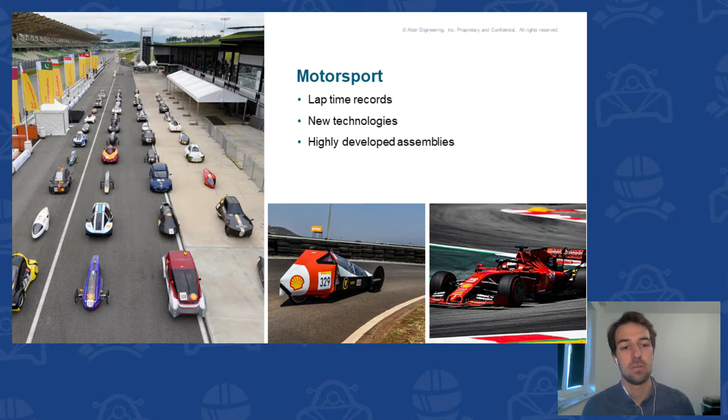Of course, motorsport is a big engineering challenge. Not only automotive companies are continuously under pressure to set new lap time records, develop new technologies, and keep on breaking their records. Part of this are race cars. They are characterized by highly developed assemblies - engine, chassis - and of course external aerodynamic and internal aerodynamic characteristics are a main part of it.

The same yields for the Shell Eco Marathon. Every year, all these teams compete on events in ultra efficiency classes. Beside the drivetrain, the kinematics, and the software, the external aerodynamic is an essential element to reach ultra efficiency.

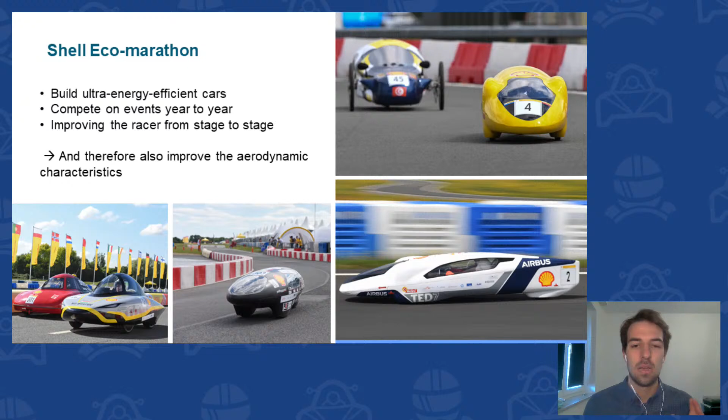Let's start from the beginning. What really is external automotive aerodynamic? Let's say external automotive aerodynamic is related to the flow around the vehicle. And the flow around the vehicle then directly leads to forces acting on this vehicle.

So what is it? The drag is the force which acts against vehicle direction. It's directly related to fuel consumption, maximum velocity, and range. The lift force is the force which pushes the vehicle on the ground, and it's related to driving stability and cornering behavior.

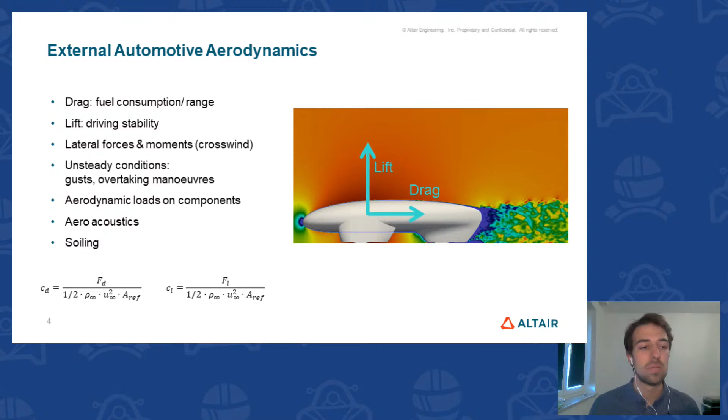So the big question is, where does it originate from? Can those regions really be identified? And can we maybe have a little bit deeper look into it?

In respect to Shell Eco Marathon vehicles, I think the most important might be the proportion and shape, and of course the wheels and the wheel housing.

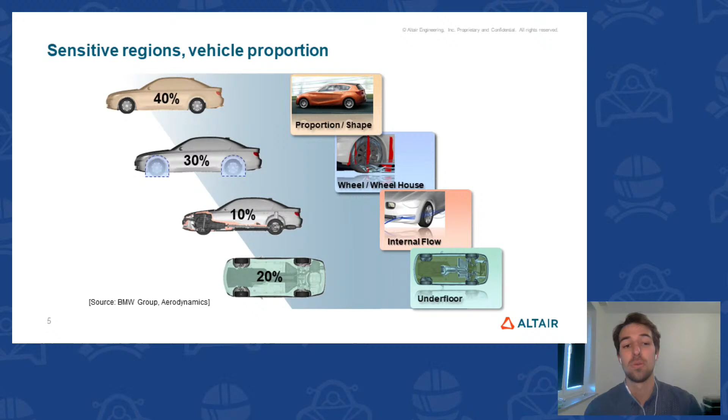So imagine you're driving in the city, and now you change that coefficient of drag around 0.01. Then the fuel consumption changes also, about 0.01 liter per 100 kilometers. That would be related to a change in vehicle mass of about 6 kilograms.

Now imagine you drive a little bit faster, let's say 120 kilometers an hour. Now we change this coefficient of drag about the same amount. The fuel consumption changes now about 0.09 liters per 100 kilometers. And this is already related to an equivalent mass of 129 kilograms. Quite a lot, don't you think?

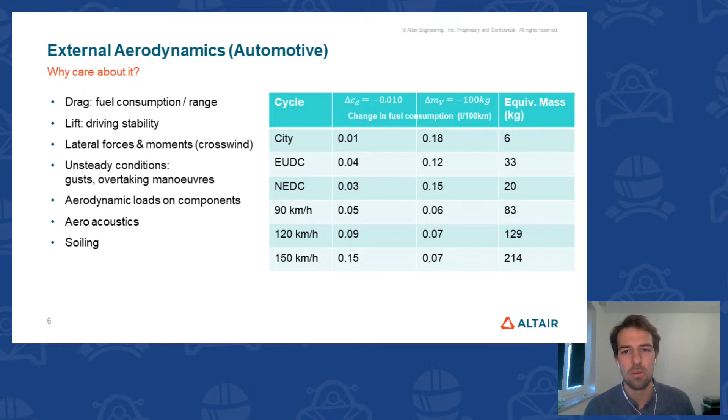Okay, so now we've got it all in place. Let's have a look at what it's all about to optimize the aerodynamics.

Optimizing these aerodynamics is quite a difficult task. It requires theoretical knowledge, experience, experimental data, maybe from wind tunnel or simulations, and all this put together has to be achieved to reach an efficient, balanced, and good aerodynamic setup.

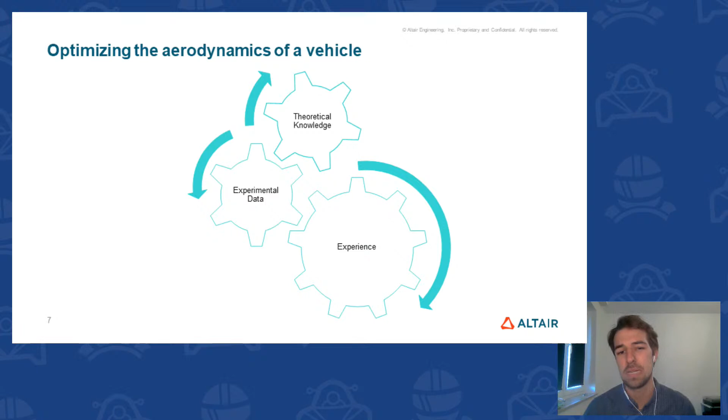So today my mission is to give you an ultimate insight into lower energy consumption and better performance from optimized aerodynamics. So let's have a look at what we're dealing with in detail.

This is me, Paul Over, and I'm going to present to you today the optimizing of the aerodynamics of the vehicle. And first of all, we have a small look into theory.

It's quite a difficult task to understand the aerodynamic behavior. So we'd like to get up some theoretical knowledge from maybe your classes or school to really follow everything. Of course, simulations are also nowadays an integral part of vehicle development and thus an integral part of engineering life.

So after that theoretical part, there follows a practical one. I'm going to show you some brilliant software which makes it really intuitive to set up a simulation for your own Shell Eco-marathon racer.

And in the end, we, of course, have a look at some results I prepared and talk about common ways to process your simulations in an efficient way and really get your design iteration going. And after this whole session, you should be able to start with your own ultra-fast simulation.

So let's hit it off. Let's start with some basic advice in ground vehicle aerodynamics. How does reality look like? Okay, it's not really the reality.

It's more a kind of a schematic car sketch I took here, but let's try to understand it.

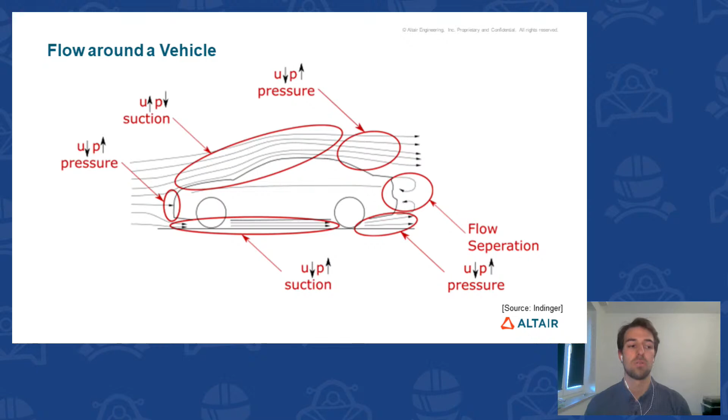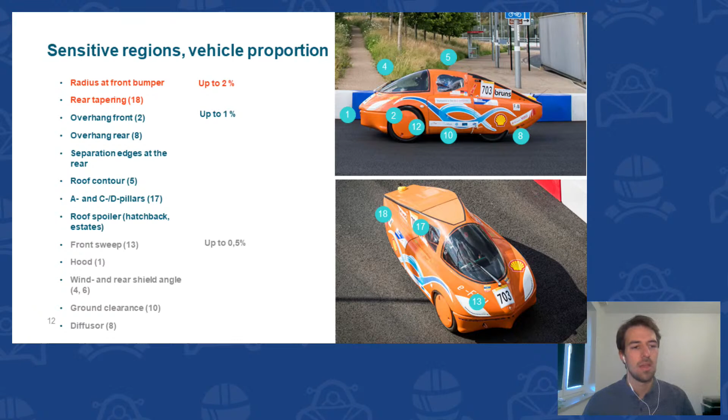And when you remember the numbers from the beginning, think about how much energy you could save by optimizing it. Quite a lot, don't you think? So how do we optimize it? How do we save these amounts?

Okay, like I already said, and like you saw on the last slide, there were a lot of numbers placed on the lower end of the car, close to the underbody. The underbody should be separated into ground clearance and pitch, and also underbody covers.

If we increase the pitch so the nose of the car goes up, it would lead to increased drag and lift. A negative pitch, nose down, creates a pseudo diffuser effect on the entire underbody, which reduces the drag and lift.

The smaller the ground clearance, the lower the drag, of course. Regarding lift, there's an optimal ride height for the car - an optimal gap to create the optimum amount of lift. It's a good screw to really get the balance of the aerodynamic setup right.

When we come to underbody covers, it's quite important that the flow under the vehicle is smooth. Therefore we need to reduce the roughness of all the tubes and parts down there. So when it's possible to cover the underbody starting from the front, as far downstream as possible, that's quite good.

But attention here - complex shielding of the underbody is not always possible. There may be thermal requirements, cooling or air transport needs, or other constraints due to chassis or axles. Like here in the picture, only the blue parts were replaced and fully covered.

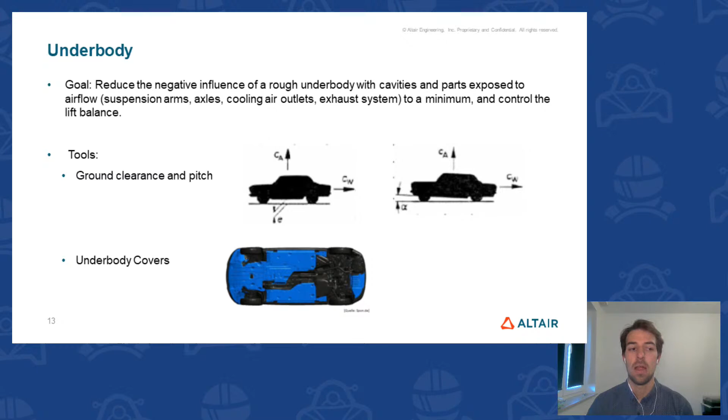Like I already introduced, there's a design, a device, which can help quite a lot. It's called the rear diffuser. The installation drag we already had is nearly close to zero, which makes the diffuser really helpful.

A well-designed diffuser can help reduce drag and also lift. In general, longer diffusers are a little more efficient, but they only work well for undisturbed airflows, as found on many of your vehicles.

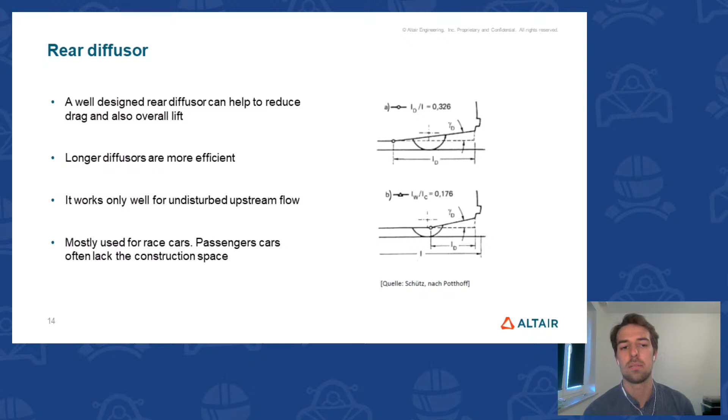Like here in these small pictures on the right, there are some special numbers and maybe some strategies to improve their working. Work with these theories, apply them to your car and simulate them.

Another part on these Shell Eco-marathon vehicles are, of course, the wheels. When we look at the picture and at efficiency, we always see that the wheels take up a big proportion of the overall vehicle.

The superposition of the flow around the car and around the wheels leads to a super complex flow, and the additional wheel rotation introduces another effect. So we can sum up that the total drag of the car is produced 30% by how the wheels look and how they perform. So there's lots of potential for optimization.

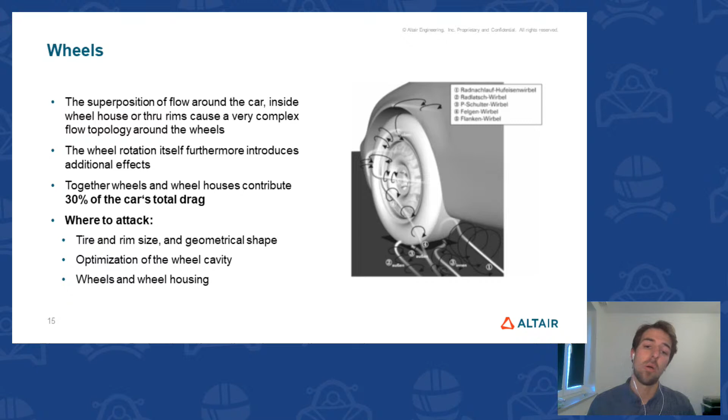So where to attack? We could alter the tire or rim size, or go to a closed wheel setup instead of an open one. I just want to point out: do experiments, or better, run simulations to get the optimum.

But as well as the wheels, there's also maybe a big last point I'd like to speak about. All the vehicles need some cooling air for either the fuel cells, the batteries, or even the engine. These inlets and outlets of your internal flow are also quite interesting, and I'd like to speak about how to design these interfaces.

Now, when we look at type C, the air flows into the radiator at the lower end and flows out at the upper end again. So normally a little bit more hard to realize on most vehicles, but we have a really low drag and the mass flow is nearly the same. So the conclusion is that inlet and exit with face in normal stream direction does not necessarily include low drag values. Be creative and experiment around to get the optimum design.

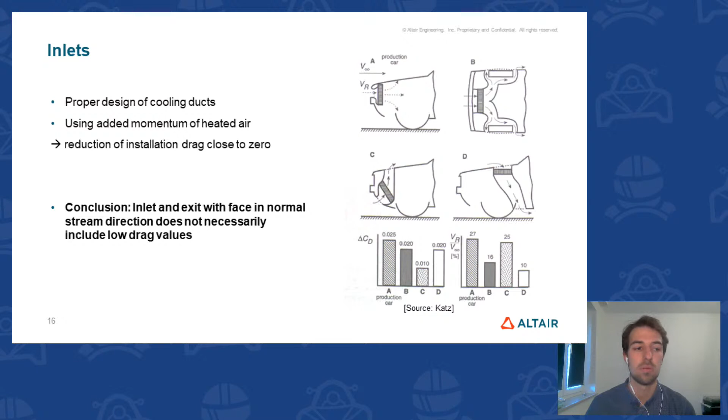Beside the inlet, of course, there are the exhausts. Nearly the same importance applies for them. In general, we can say that they should be placed in low pressure regions or low pressure coefficient areas to make them work a little bit better, to perform them better. But attention here, the outlets always increase the boundary layer thickness and therefore the likelihood of that phenomenon flow separation, which leads even to more drag. We already had that in the schematic car slide, that flow separation is mostly associated with drag.

Let's have a look at some examples here as well. For example, in part A or figure A, here we have a conical sheet metal, and the influence on drag and pressure is quite all right, I would say. In part D, we have a flush exit. Compared now to part A, we have nearly no influence in pressure and less influence in drag. Additionally, when we set it right, we can also improve the momentum transport to the boundary layer and bring more kinetic energy close to the vehicle. But be patient with that.

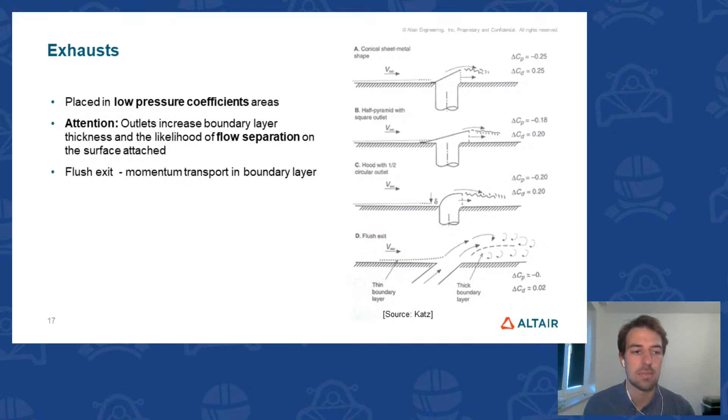Okay, closing up this really nice reality one, let's switch also to the virtuality, which is also a big part. When it comes to simulation, we should talk about this as well. And why should we use simulation? What are the common methods? Or maybe some questions you're asking yourself. So what and why should we use simulation?

First of all, maybe there's a point of money, of course. Here's more comparison: the small prototype developed in the high-end wind tunnel, it's quite expensive. Another point for student teams, it's a big point as well, that there is no wind tunnel or that you can't use it all the time. So computational fluid dynamics is a flexible and fast alternative to wind tunnel experiments. CFD offers almost unlimited possibility for the analysis of flow fields. You can just click on the mouse, zoom around in these computational domains, and check every value separately. Coupled with this really high computing power of today's computers, CFD makes it possible to develop more complex aerodynamic components and further increase the performance of the vehicle without building and testing everything like some big car companies do when they produce these mock-ups or prototypes.

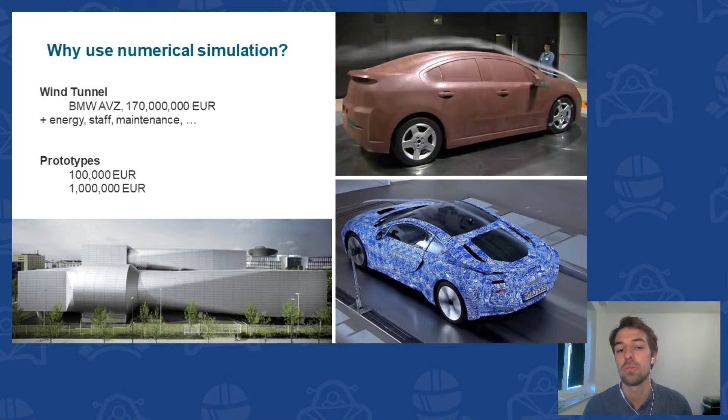But let's have a look at what's on the market. So on the market, there are two big ones. These are just the common ones, I would say. I just picked those. So we have the Navier-Stokes approaches, which are maybe known through fluid dynamics classes, and another one, the Lattice-Boltzmann one. The main difference between them is how they interpret the continuum. The graphic on the right summarizes those differences quite well, I think.

So let's start with Navier-Stokes. Navier-Stokes is a conventional CFD solver, and it uses a macro scale interpretation. It means that length scales are as we know them in meters, millimeters, or feet or inches. The continuum is divided into small cubes like your room. The wall is 5 meters long, the other 3, and we can divide this room by having 1 square meter places all over.

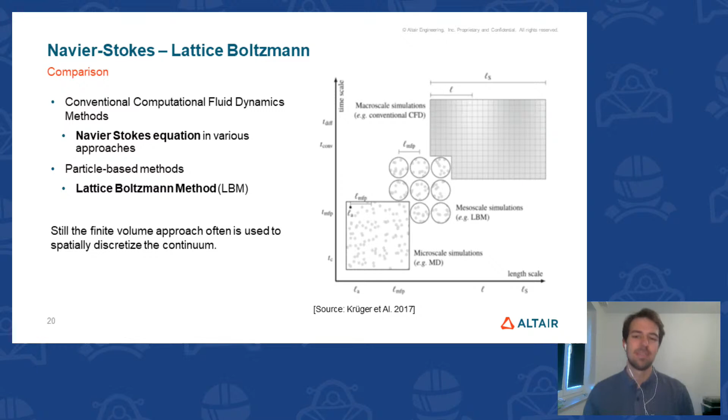Both methods, Navier-Stokes and Lattice-Boltzmann, are often used or implemented with a finite volume approach, which is used to spatially discretize the continuum. But now, if we take the comparison from a theoretical view to a practical one, we can show a bit more advantages.

In a direct comparison of the methods, of course both can describe the external aerodynamics. The Lattice-Boltzmann method is transient and explicit. The Navier-Stokes is implicit, mostly steady state. So Boltzmann, due to its transient and explicit nature, gives us more accuracy. It's possible to design aerodynamics more exactly, especially when it comes to high-end efficiency. It's even possible to look at aeroacoustics. In the Navier-Stokes way, all the transient information is often averaged and summed up into one single shot or frame, the steady state one, so we can't capture all the effects - for example, the cavities or the vortices around the wheels.

When it comes to the mesh comparison, there are also some differences shown in the image below. In the Lattice-Boltzmann, we have a surface mesh with really low surface mesh requirements, which shows that around the edge it doesn't get much finer. In the Navier-Stokes one on the right, we see high surface mesh requirements - around the edges the trias get really small and they are high quality. It takes a lot of time to work on this.

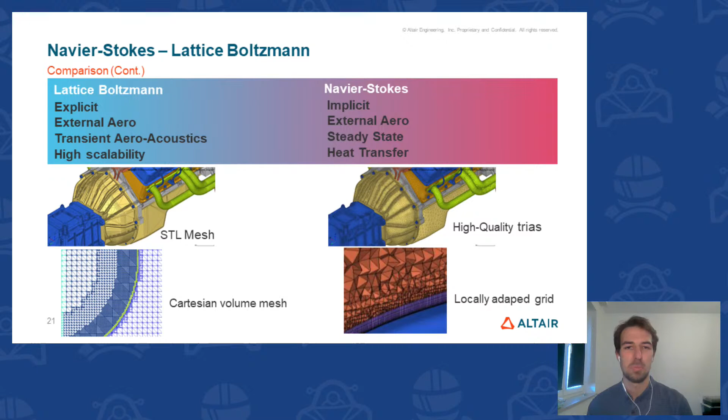Let's have a look into some small last theoretical base things and then start off with the practical part. So the Lattice-Boltzmann method is based on the Boltzmann equation. The Boltzmann equation is comparable to the Navier-Stokes equation, but now in a totally different approach - it's solved on the lattice. The lattice is constructed out of these voxels. On the right, you see one.

Now the solving step is separated into 2 steps, the streaming step and the colliding step. Particles stream in a determined direction in the streaming step. Then they collide in the colliding step, and in the colliding step new velocities for the next streaming step get computed. Now we discretize, and we just allow 19 different velocities, because we use a D3Q19 velocity set - 3 dimensions, 19 velocities. Due to this discretization, we keep the transient nature of the flow inherently respected, and the physical behavior is determined directly by the viscosity of the fluid.

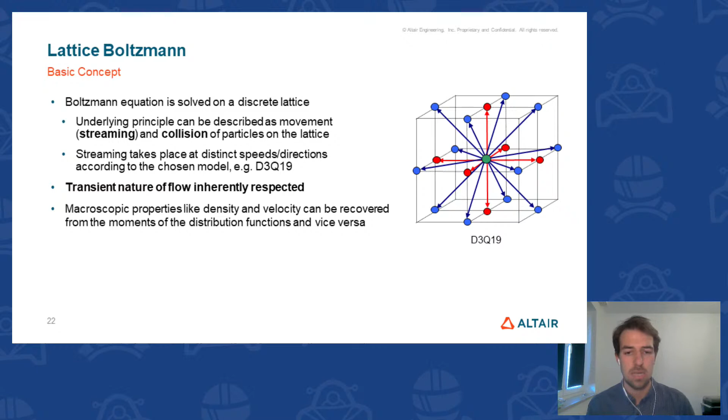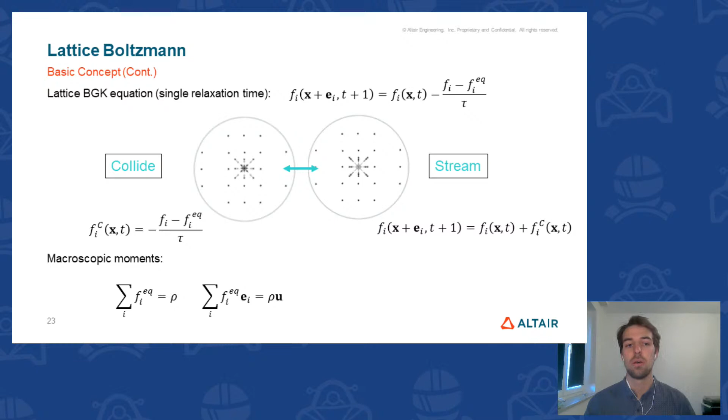So let's take a small look into the iteration process in detail. The iteration process, like I already said, is divided into the colliding step and the streaming step. Up in the right corner, you see the Boltzmann equation - it sets the recent and the equilibrium density of particles into relation. In the collision step, of course, we determine the next velocity. In the streaming step, they stream in the direction with the assigned velocity. Based on these equations, we can recover the macroscopic moments like velocity, density, and pressure, and then reach our transient simulation result.

Now just summing it all up, the theoretical part was maybe quite a deep thing, but let's break it down to some basic things. We have low surface mesh requirements, trivial volume mesh generation, and transient simulation, which should be even more interesting in regard to high efficiency aerodynamics.

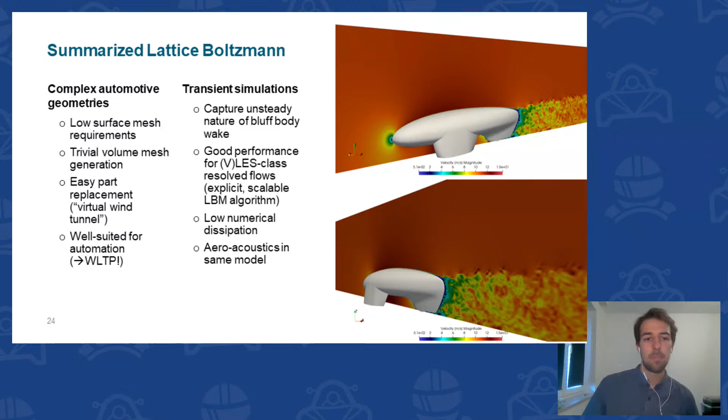So let's get back to the slides. I think it's quite enough with theoretical background. Let's see how the things really work.

Every simulation has a simulation pipeline in this general way. First, the preparation, the surface preparation, which is what we do in Inspire. Then we go over to the pre-processing, the setup of the simulation with the wind tunnel, following with the solving, where we use UltraFluidX. And the last step, we post-process the results by using AcuFieldView.

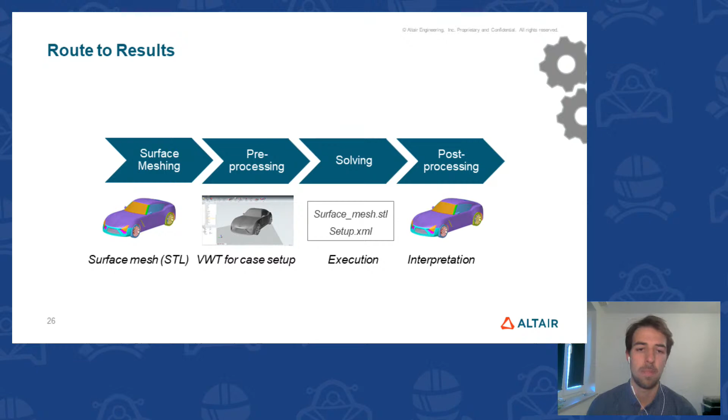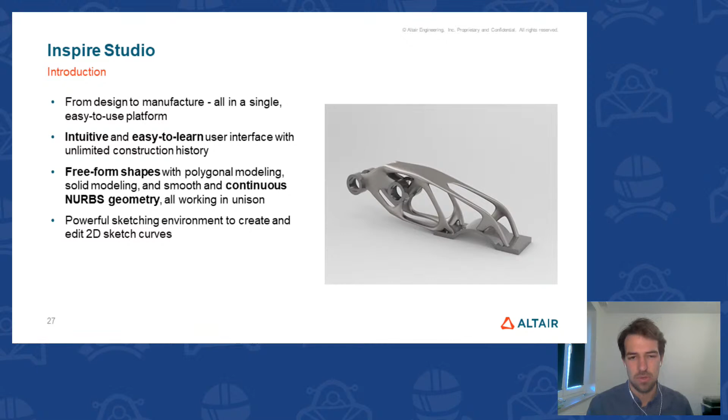Let's have a look at the programs in detail. From design to manufacture, all on a single easy-to-use platform, Inspire offers an intuitive and easy-to-learn user interface where we can free-form shapes with polygonal modeling, or what I really like, continuous NURBS geometry, where we really control the whole geometry. We have some sketching environment, and of course we can discretize to surfaces, which leads to a smooth transition.

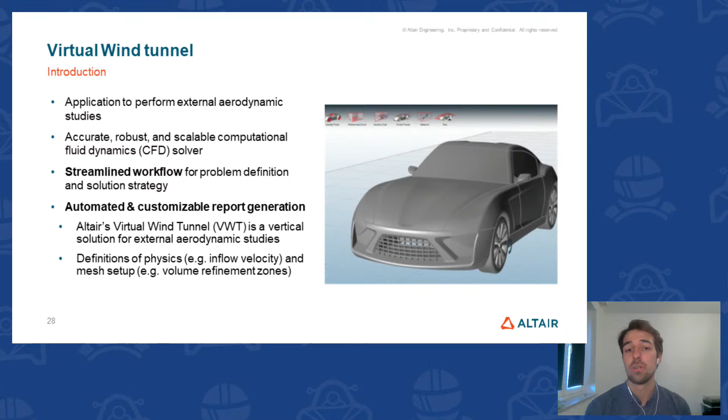To virtual wind tunnel. Altair's virtual wind tunnel is a vertical application tailored for external aerodynamic studies. It's designed with the users and their needs in mind. The graphical user interface provides easy access to problem definitions. We have automated and customizable report generation, and good design evaluation. From there, we export then to UltraFluidX.

UltraFluidX is the main part. It's a simulation tool for the prediction of aerodynamic properties, technology based on the lattice-Boltzmann method. This allows us ultra-fast transient simulation, which leads to small turnaround times and quick design changes. It's optimized for GPUs to deliver extreme performance.

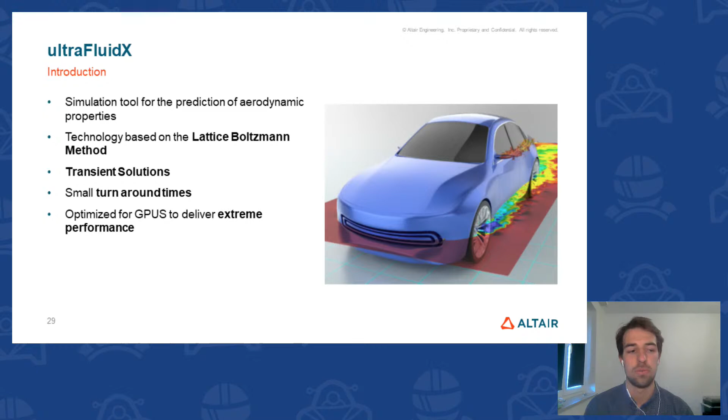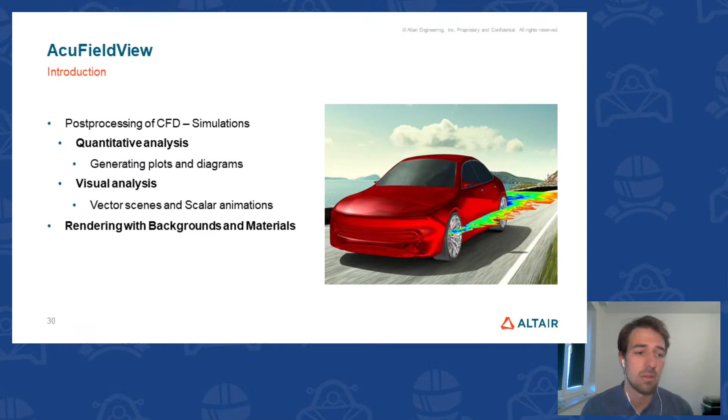When the simulation has terminated, we can easily import it into AcuFieldView, where we do the post-processing of the simulation, either in quantitative analysis by generating plots or diagrams, or in a visual one, having a vector scene, a scalar animation, or it's also possible to do renderings with backgrounds and materials, which makes it really look super interesting.

But why am I talking that much? Let's have a look in detail how it really looks like.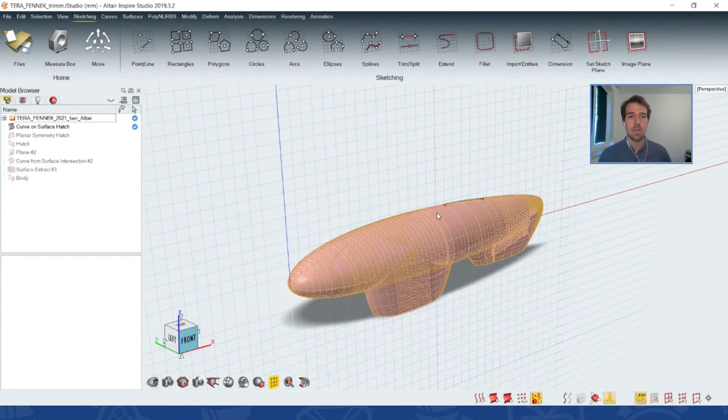I prepared a model which is just popping up right now for you guys. We're here in Altair Inspire Studio, and we got the TERA Fennek, which was handed in by an Shell Eco-marathon team. Thanks for this, guys. We'd like to just see how the program is working. The last days you already had a small introduction with Eric in the Altair programs.

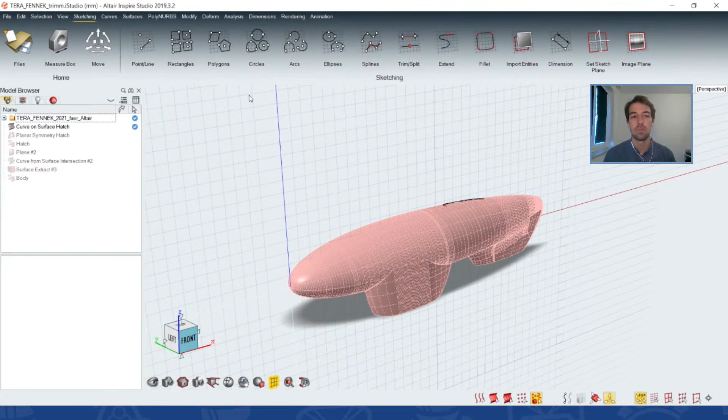The workflow here is quite similar, but I want to point out a bit. First of all, up here you have the move function. I found it really important to know how to move and control it. When we click here on move, we can either move it up or down. When we like to rotate, we just click on the mouse wheel and spin around the center of gravity. When we translate, we just use the right mouse button. And when we select like this, we can translate the model around maybe 10 millimeters, or let's put it on 25 exactly.

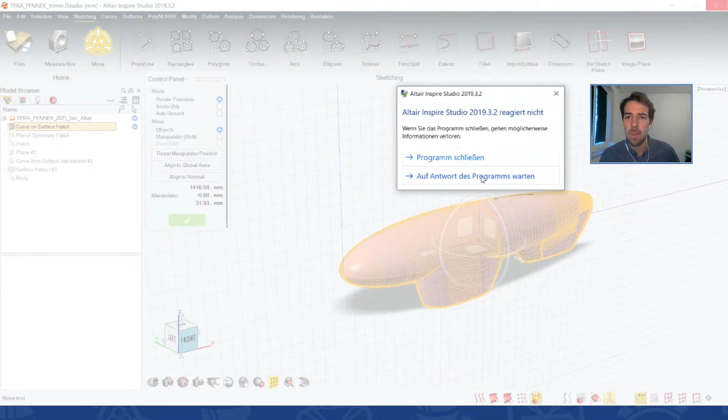Oh, we got a problem here. It shouldn't be doing it. Yeah, maybe too much workload here. I'm really sorry that happened. Should be working right now.

Let's skip that and continue first of all with the more exciting part, the virtual wind tunnel, which is the main tool to set up the simulation.

I would like to show you that we can really customize easily the tool, using Inspire to optimize or maybe to create a small wing or flap on the top or below, and then smoothly export it to virtual wind tunnel.

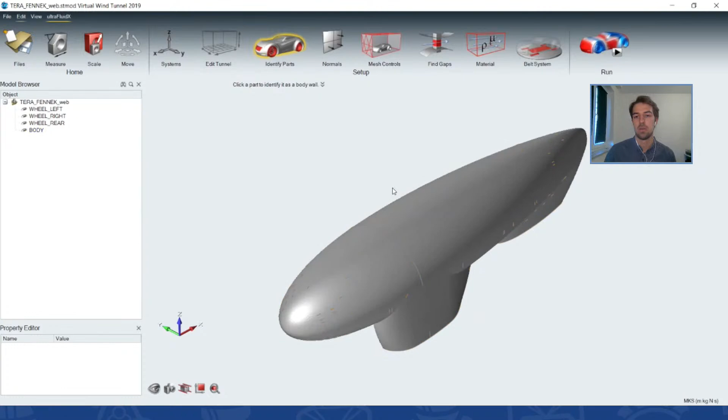Virtual wind tunnel is made similarly to Inspire. We can, of course, rotate this vehicle by the same amount with the same controls. We can translate it and select it like this. I just imported the model straight off, and then I stopped to wait for you guys. So let's start with that.

First of all, we like to set some good settings up here. I just take the model browser and the property editor. It helps you keep good control over all your setup. Then we just speak about the streamlined, action-oriented user interface. We have a system, and we just follow it all up until we run the simulation. You just have to follow all these steps.

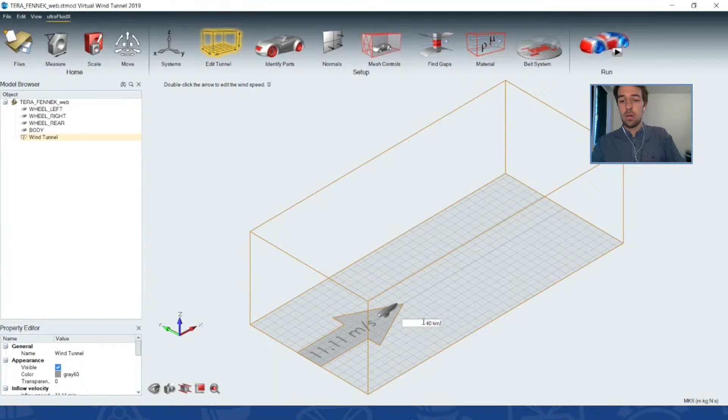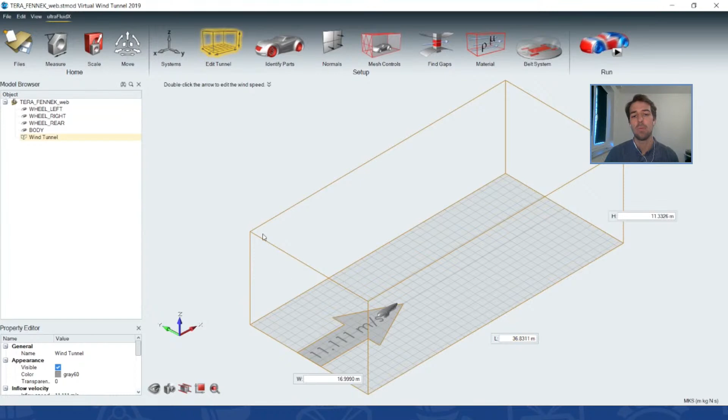Now I'd like to start creating a wind tunnel with you. So we click on Edit Wind Tunnel, and we see it pop up directly. When we enter the inflow velocity, let's say 40 kilometers per hour, due to the SI representation, the virtual wind tunnel automatically converts this to meters per second. If you're using American imperial units, you can enter those as well—quite handy. Coming back to the dimensions, we can easily set the width, length, and height of the wind tunnel. I'll leave it like this for now.

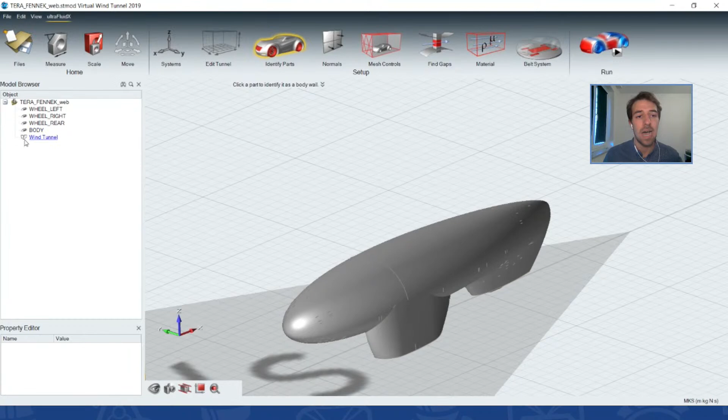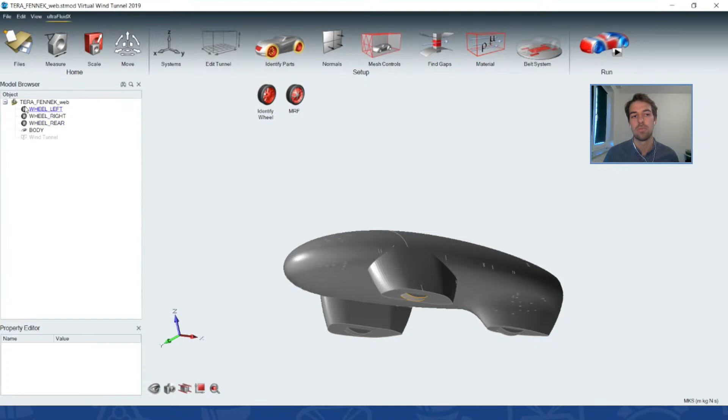We can deselect the wind tunnel and continue with the next ribbon, which says Identify Parts—let me zoom in a bit. If we click Identify Parts, Ultra needs to know which parts, like the radiator or the wheels, need to be handled separately. When we click on this and select the part, we still have this car ribbon, which I think is the default. So we'll disable the wind tunnel by clicking it, giving a better view of the wheels. Then we click the Identify Wheel button and select those. When we do this, the icon of the body changes to the wheel icon, which is really helpful for double-checking.

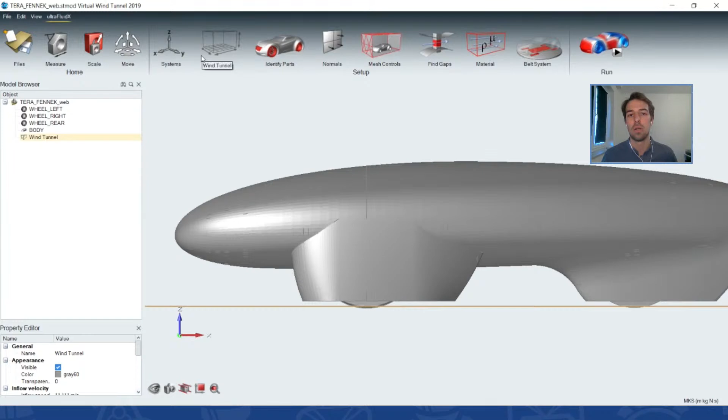Now, to make sure the wind tunnel is in a good position and the wheels touch the ground, we can select the perspective view and then switch to the orthogonal view. I was already in orthogonal view, and there you can see we slightly penetrate the wind tunnel wall, which is actually good to simulate a kind of deformed tire. The tire velocity and rotation rates are easily computed by Altair Virtual Wind Tunnel, so we don't have to worry about it. Due to the inlet velocity—well, now I'm getting a bit lost. Good thing there are keys to get you back when you're lost in mouse control. Happens to me still. So virtual wind tunnel takes the inlet flow velocity and computes the rotational speeds for all the tires.

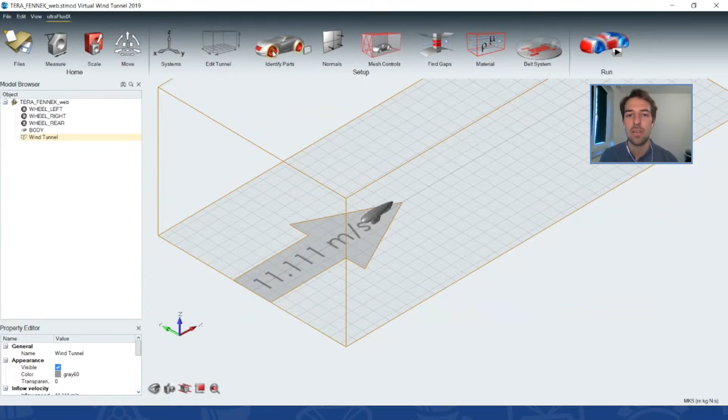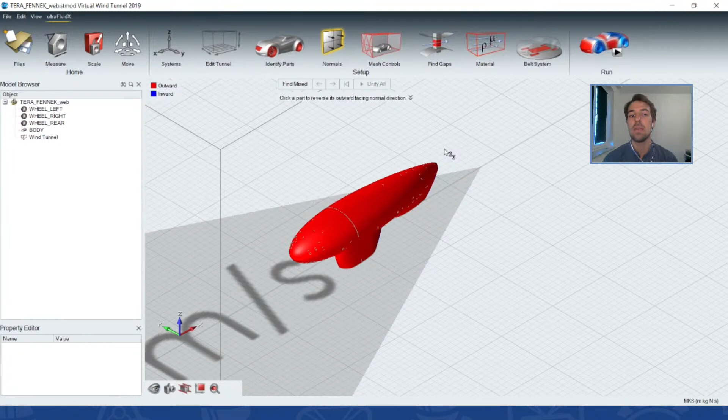After setting up the tires and assigning all parts, it's important—a main goal—to check the normals of the surface discretized objects. Here they're displayed in red. I don't have to select any part, though we could select more parts if needed, but here it's already done. All normals turn outward, meaning Ultra sees the fluid outside the geometry. If they turned inward, shown in blue, Ultra would interpret the inside of the body as the fluid domain, which isn't suitable.

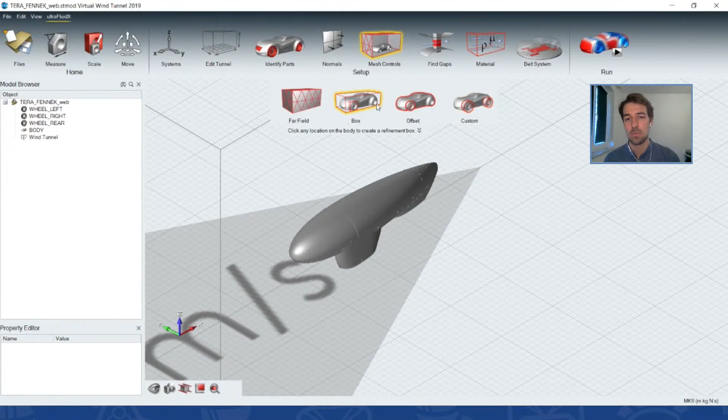Okay, we got that done, so we're nearly ready to run the simulation. But right now we just have a really coarse mesh in the far field. We can check this by going to Mesh Controls and Element Size—here it's around 20 centimeters, which I think is quite good for the beginning. But the whole domain would also be resolved with these 20 centimeters, so it would be nicer to have better resolution closer to the body. Therefore, we can use rectangular, offset, or custom refinements. Rectangular refinement just puts a region around the part—we click on the car or a part-based rectangular refinement, then click on the object and it generates that. Part-based refinements work the same way and are easy to activate.

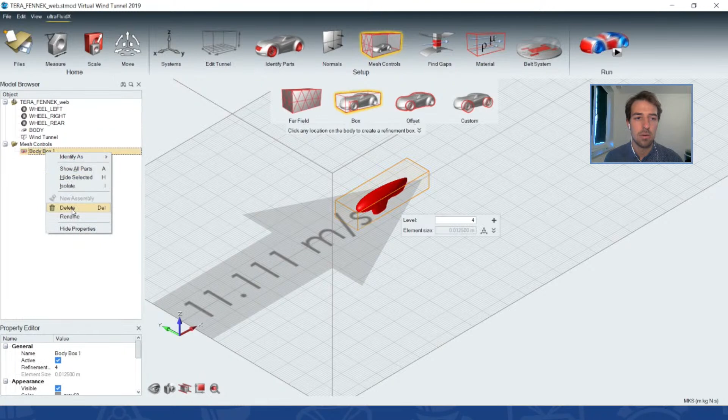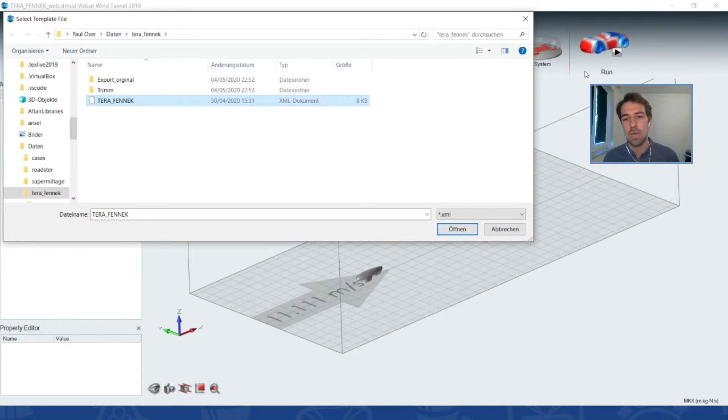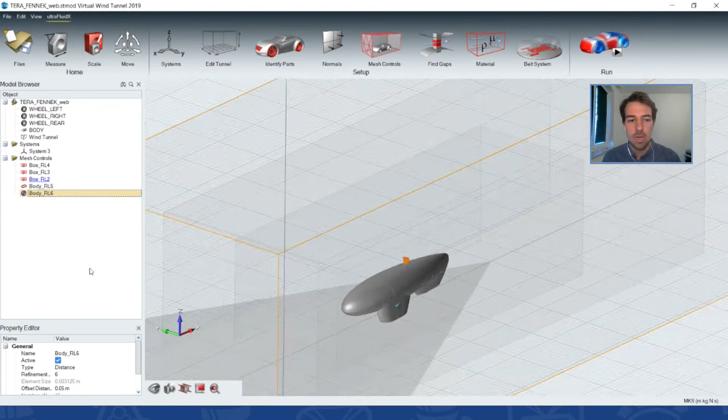There's also a really nice option when running design studies—you don't have to set up all the mesh controls every time. You can click File, Template, Import Full Simulation Setting, then select the XML document, which is automatically exported by Virtual Wind Tunnel from your first case. Click OK—in German, öffnen—and all your mesh controls and everything else are loaded and filled in. I've also prepared the body-based mesh control, which I indicated with these arrows. Down in the Property Editor, you can see all the details without even clicking it. I like it a lot, but just wanted to point that out.

The simulation is nearly set up in total. So quite easy, right? We just need the material. Now we have air selected. Of course, that makes sense.

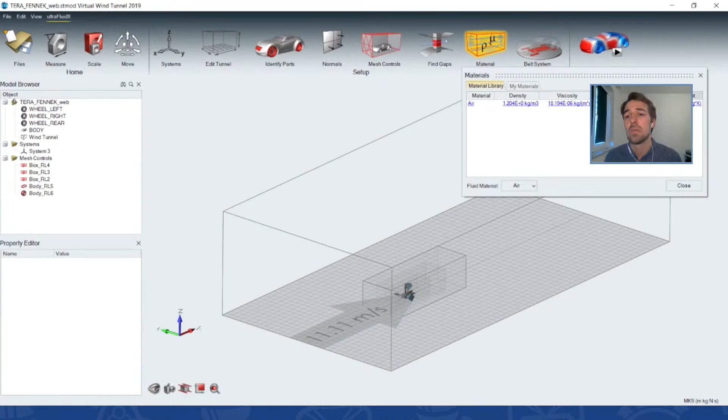We need some specifications to give here, but I think this is in the default library, though we can also set up our own materials, maybe the airflow from your last wind tunnel session, where you also had a belt system applied.

Then you can do an easy validation of your results by using Ultra. When everything's set up, you just click on Run, easy. Then on Export, and then you're ready to go with the simulation.

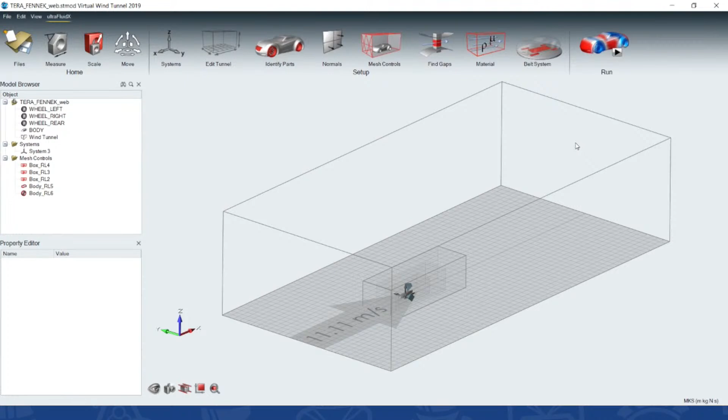Now we could start the simulation, but waiting for it to finish would probably exceed the limit of this webinar a bit. Fortunately, I have prepared the whole thing already, so we'll switch back to the slides to have a look at some results.

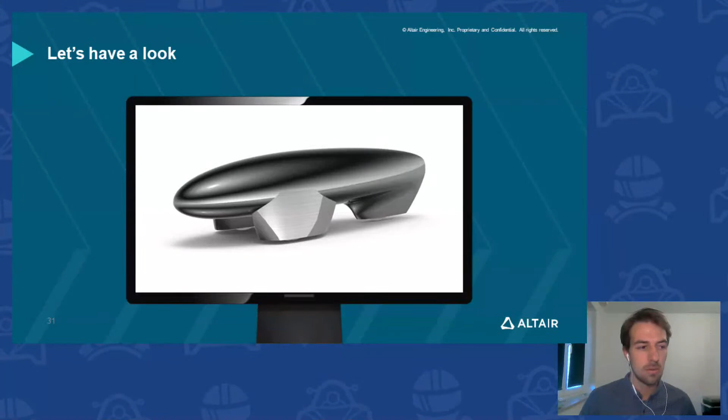Back on the slides, we now just have a small excursus to summarize the facts you all heard in this practical session. So first of all, what about the surface requirements?

The surface requirements can be broken down to only triangle elements. The surface should just be covered with those, no quads, just trias. The element quality is of low importance. Part intersection is allowed, so don't worry about that. And then the most important one, I think, is that the surface normals must point outwards.

A good recommended setting is to have everything closed and watertight, though when it comes to meshes that's usually a common problem. But if there are small cracks due to CAD problems or something else, it doesn't matter that much for Ultra. Sometimes it's even able to get those things done, and I really like it because you save time by not having to chase down the problematic places.

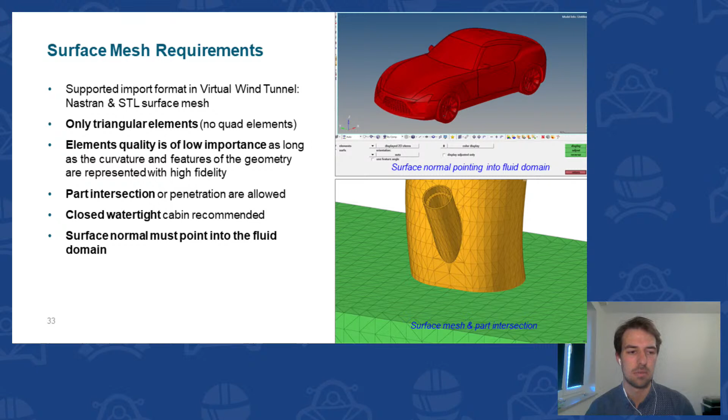When it then comes to the setup of the domain, I also have some guidelines for you. First of all, it's important to understand that voxel size and number of iterations determine the computational time significantly. In general, a good rule of thumb is to have around 30 to 50 flow passes.

These are suitable to reach convergence in automotive setups. One flow pass refers to the time it takes for a single fluid particle to completely stream over the entire body of the car.

Coming back to the domain, it should show a blocking ratio of around 0.1%. I mean the projected area of the vehicle in flow direction divided by the area of the inflow section of the wind tunnel.

On the right, you see some dimensions given in respect to the vehicle dimension. I thought this would make it easy for you to adapt to your own vehicle. If you have the wind tunnel in these kinds of proportions, you can easily set up your own simulation and have a good baseline to start your mesh iteration, or as you do your design iteration.

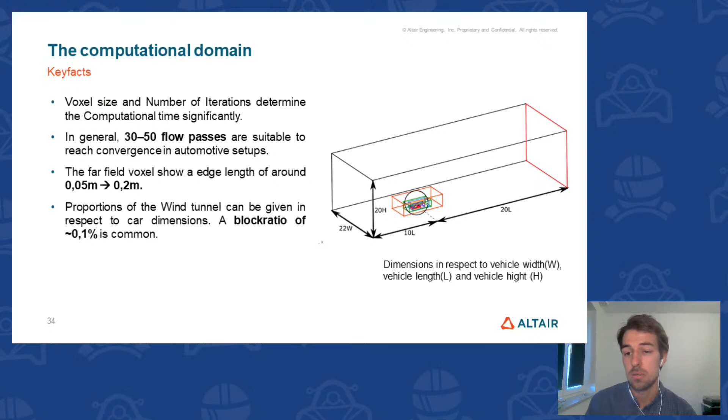Finishing up with the far field, from a relatively coarse Cartesian background grid, the mesh should consecutively refine towards the surface, like we already discussed in this small presentation. The outer levels we already saw are therefore often created by boxes, and I have some guidelines for you there as well.

Talking about rectangular refinement, it's of interest to know what you'd like to achieve. We like to achieve around 3 to 6 millimeter voxel size at the boundary to the car geometry. Usually it will take about 8 different refinement levels to get down there.

So I wrote down these guidelines in the table to give you some variables to iterate. The numbers in brackets deal with the length that should be before the vehicle. The numbers without brackets show the length behind the vehicle, like we had on the last slide.

But pay attention when you set up these refinements and tune around on them. Time stepping on refinement level 0 yields an adequate sub-time stepping in the next refinement zones. This means one time step on refinement level 0 covers 2 time steps on refinement level 1. This is all because it's an octree based 2-to-1 refinement technique.

So I just want to make you sensitive to the cost of the refinements. Don't be surprised if you end up with way larger cell counts.

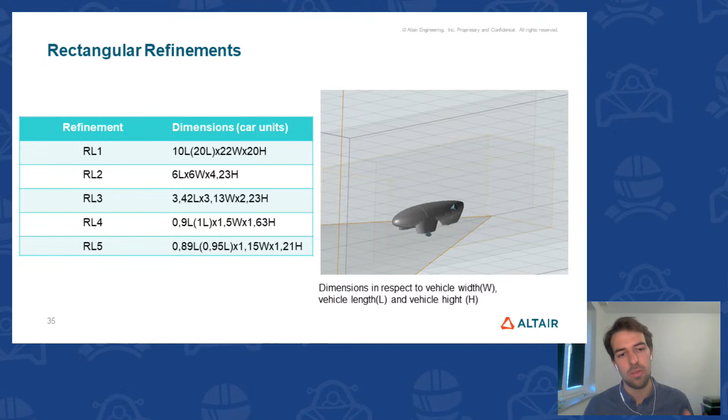Instead of defining these wraps, we can also use custom-made volumes to control our meshes. These predefined custom refinement zones can be adapted to new, similar geometry using a morphing tool in the software, which I'd really love to show you. It's quite easy to handle, so keep this option in mind.

For example, here on the mirror of the Roadster, shown in orange, the idea is that you can morph a volume around that to control the mesh. Another idea would be, like in the lower animation, around the wheels - the region can be extended to fit the whole tire wake. So instead of using an offset, you can just do it manually, having less refinement to the front and more to the back where the result is, and in the end you gain more accurate results.

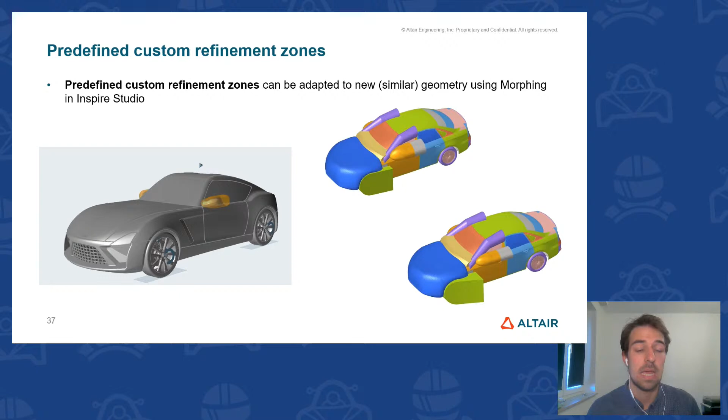Coming already to that point of tires, additional information for you maybe - you have these outstanding wheels on the Shell Eco Marathon vehicles, whose influence should be analyzed in more detail because it's a big proportion of the vehicle.

You could use the Altair solution RADIOSS to create deformed tires, like here in this animation. Then you get even more accurate results and you can create your package more efficiently.

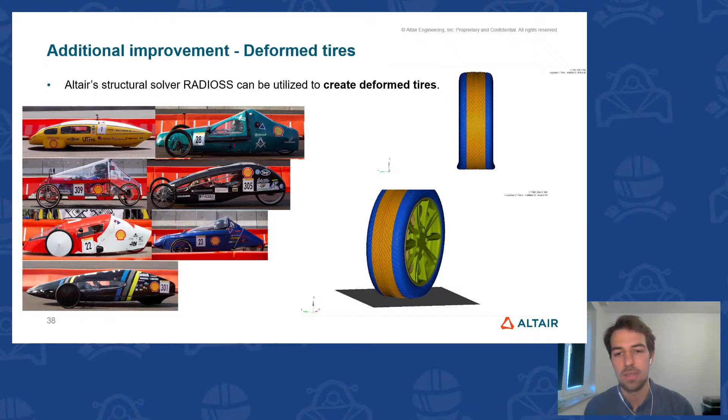Okay, let's close up the lecture part and dive into some cases I prepared. I took into account all these guidelines and ran those cases. We have the initial case from Tera Fennek from TU Graz, which was sent in, and my personal creation.

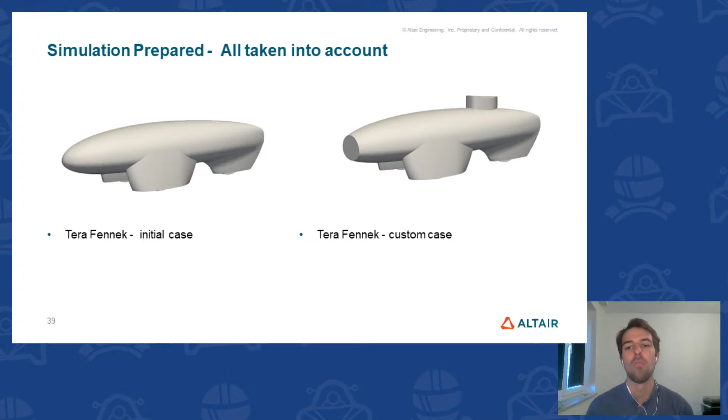I thought maybe it's nice to add a flat front bumper with a cooling inlet for the battery or fuel cell. Another good change I made was a lookout or a hatch for the driver to have a better overview of the track. Let's see how they performed.

So when we look at the results, we first have to think about the computational time. As I already said, UltraFluidX needs GPUs to run - there are some older K80 graphic cards and some newer V100 graphic cards. I just ran a few cases to give you a feeling of how long it takes and what to look out for.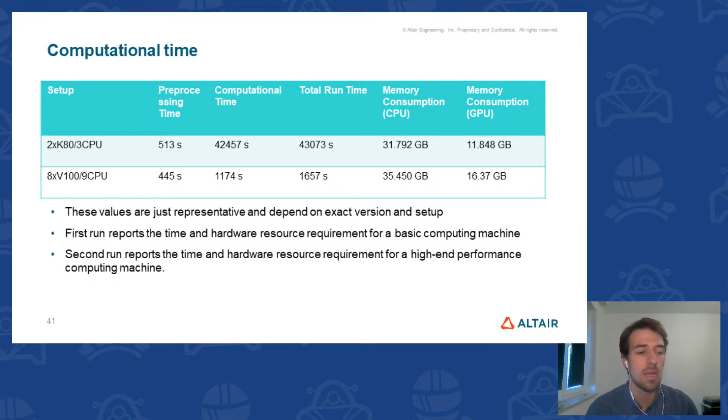On the older resources, the case ran around 12 hours. On the newer ones, it doesn't even take an hour. And in both cases, UltraFluidX's implementation achieves the same coefficient and the same quality in results.

Let's take a look at the quality. Looking at the progression of forces, we can see a launching-up section at the beginning, where the flow gets accelerated from 0 meters velocity to 11 meters per second, roughly 40 kilometers per hour. We have a peak in the drag and also in the lift. This transition peak is where the air switches from laminar to turbulent flow - you can spot it quite well.

Then, looking at the solution, the drag is nearly constant - it converges to a value - and the lift fluctuates around a kind of mean.

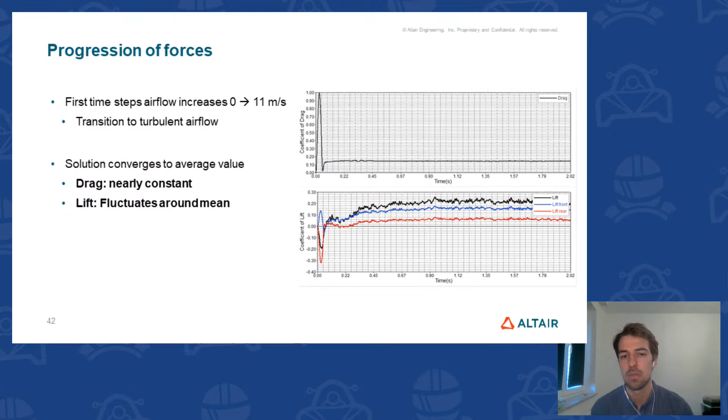Conclusion here: the simulation progress looks quite good and it's worth post-processing the simulation. Do it every time before you really start to look into all the other things. This is really helpful to just save some time there.

Summing up, taking the average of the last iteration, we can point out the CD and CL. The CD differs around 0.023 and the CL about 0.354, meaning both got a little bit more.

As we see in the animation here, in the transient way, the wakes at the front hatch determine the downstream flow field quite heavily. Also at the front bumper, we see a way larger pressure zone, and the roof contour overall also disturbed. So maybe it was not that optimal or suitable design.

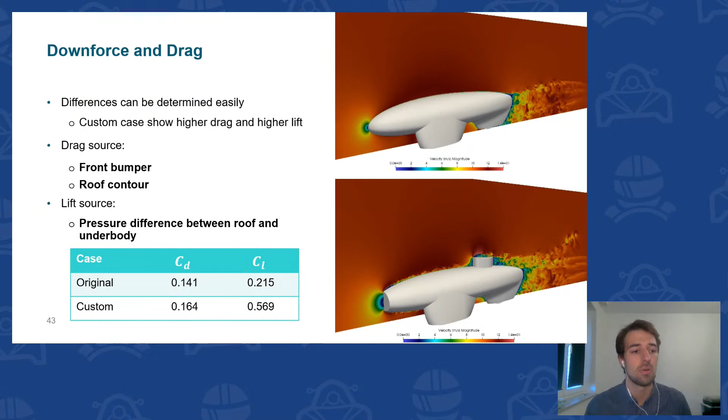To confirm, let's have a look at some more quantitative results, especially the sectional drag. The sectional drag and lift plots are generated by slicing up this vehicle into around 100 sections, or even more, then computing for every section the drag and lift coefficient. I've plotted those in these plots with the model itself in the background.

Now we can see the high influence of the drag at the front bumper, spotted quite easily in the right picture - a huge peak in red jumping up way higher than the other case. There's also the increase of lift caused by the hatch or lookout thing up there, spotted with the blue really big spike, and a drag spike as well.

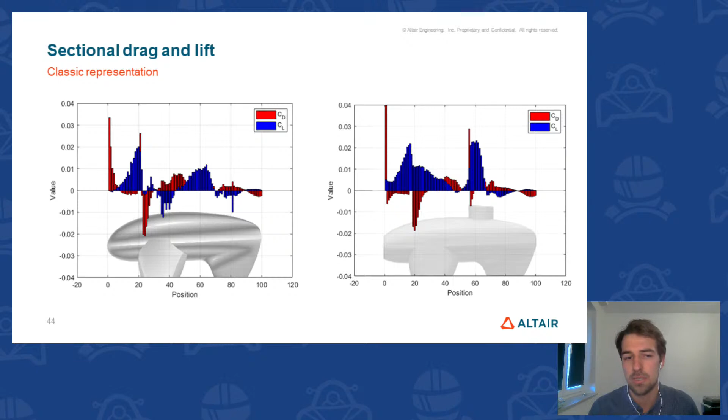Another way would be to look at the cumulated drag and lift values per section to get a really nice understanding in different ways.

Looking at the accumulated values, we see the values summed up across these slices. We should look out for strong gradients indicating major influences on the body. There's an offset in drag right at the beginning at the front bumper, spotted easily in the custom model - the number where it changes with the red line is totally different, meaning maybe this change was not the perfect one.

Changes on the roof contour imply huge lift changes. You see the steep gradient just rushing up the scale and leaving the plot off the top.

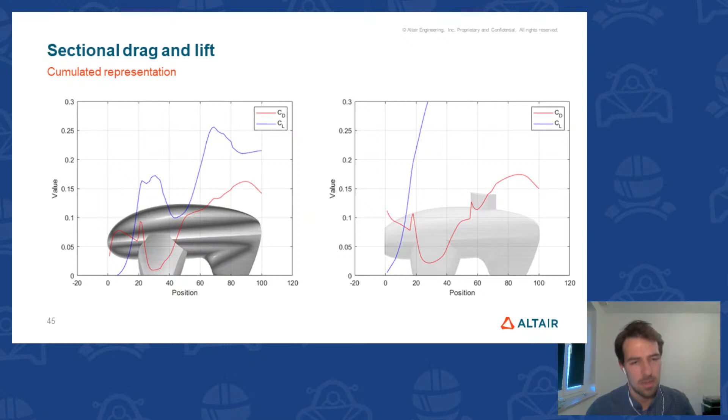Like I already said, maybe the body changes were not suitable, but let's determine first if it really comes from the body. And of course, no surprise, when we look at the drag per part, we see that the body has gained some influence.

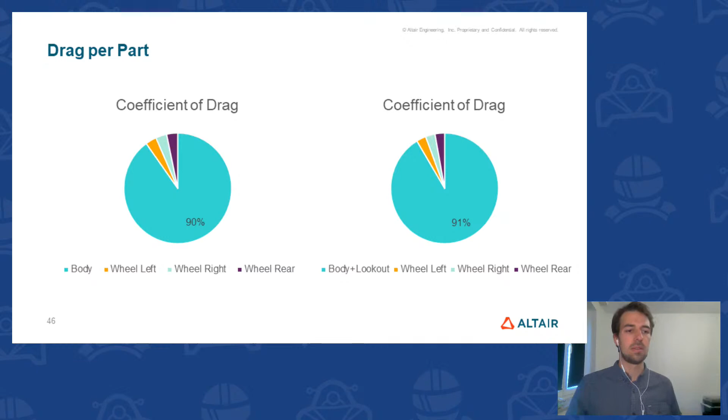What could be tested for the next iteration would maybe be to add tubercles of the humpback whale on the wheel housing to decrease the drag. We saw on those plots that the drag is sometimes a little bit rough around these wheel housings, and therefore I had the idea to see if we can improve something with that.

Of course, there's something you should definitely take home: learn from the tests you made, improve and try new concepts and designs, and use the post-processing techniques I showed. Do not only trust in nice and colorful pictures like these animations - the quantitative results are saying way more.

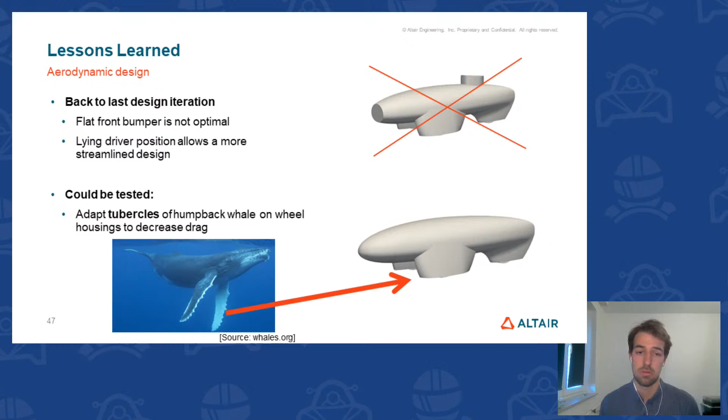Okay, and what about the tools? Is there any lessons learned? Of course there is. Summarizing it all together: the preparation time for the surface mesh and the automated volume meshing, plus the opportunity to perform transient aerodynamic simulation, this is a big advantage. Also, the quick design changes and simple workflow with this nice intuitive streamlined GUI allow fast turnaround designs, so you are able to adapt to all trends.

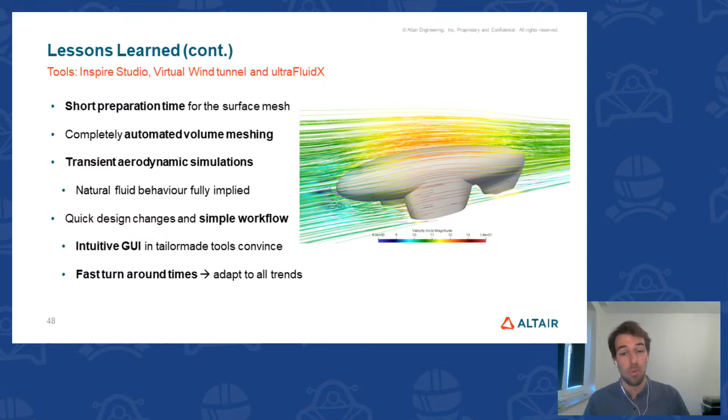Just easily test out this humpback whale idea - maybe it's worth trying and implementing on the next vehicle. Summarized, I just want to say they are easy to use and save a lot of time. I know from my student days that sometimes time is the most valuable good in project management, to get the car ready in time for the next big event, which we hopefully are going to have next year.

So now the big question left is how to get started. Let's round up this session to have a look at what you can do and how you can prepare to start your own simulation.

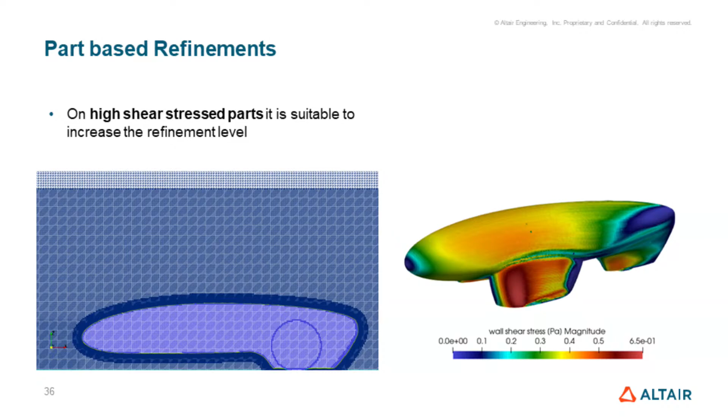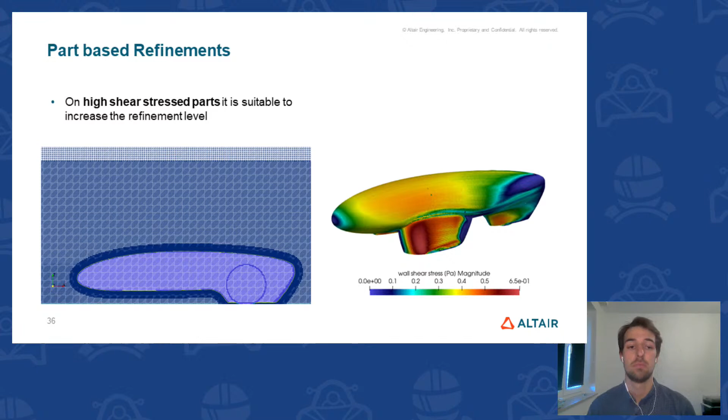Yeah, maybe we can have a look at a slide. I think it should be open up right now, slide 36, which gives us a more detailed look into the volume mesh. You can think about that we have way up in the back, like in the coarse regions, we have these rectangular shapes, and then we get closer and closer to the surface. On the surface itself we have then a fine mesh, and this has a translation into a wall model. The wall model is basically in charge of generating the boundary layer interactions and also the boundary particle interactions on that place. And this high quality wall model is the main source, or the main thing which is important for this boundary layer accuracy. Okay, thank you very much.

We may look back at the website, we had another question coming in before the previous one: are there any video tutorials available for the software on Altair?

I think we can answer this without looking at the website again, because the content I showed you today, this pipeline, is nearly brand new and is just coming from the software developing stage and testing. That's the reason why we are still working on some webinars, or maybe some material, but at the moment there is none. So this is something to look out for in the future. That means for the future maybe there are some coming, we can't say that right now. At the moment, what will be there is this recording on YouTube, where you easily can pause the things, and also I have to refer back to the ebook again, which is really intuitive and covers everything you need to know.

And of course, why would anyone want to watch a video tutorial if he or she can watch the recording of your presentation here today?

Absolutely. Another question that has come in, more on the software side, wanting to understand a bit more what turbulent model is being used by the solver?